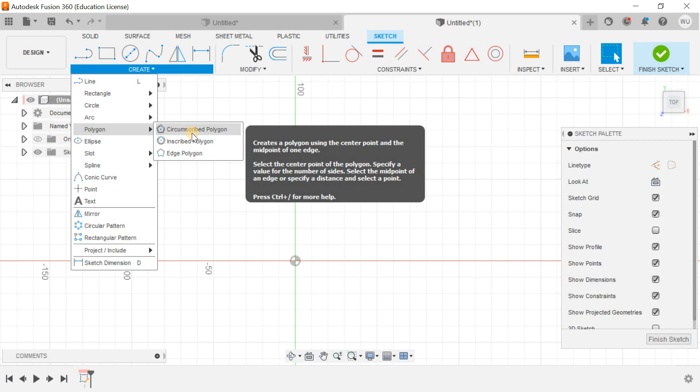Go for the sketch, and right now I will click and go for the polygon, and go for the circumscribed polygon, and here I will click somewhere here like this and define the side length 30 and hit enter.

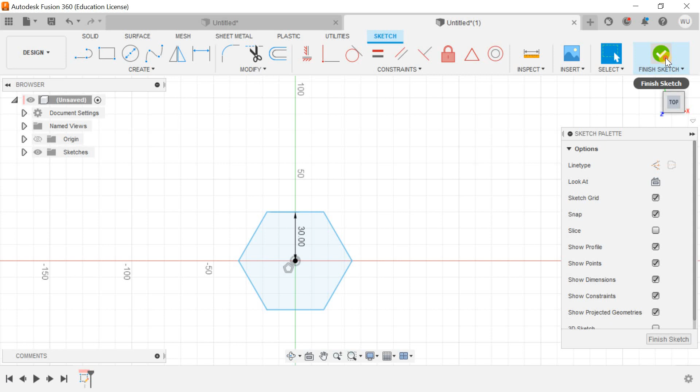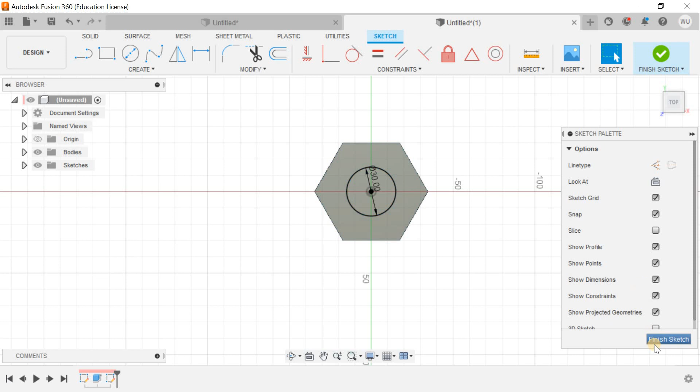Finish the sketch. Now I will go for extrude, define this one 12. Okay. Now again I will click on create sketch, choose this top surface, and starting from somewhere here define it 30 and hit OK. Now I will finish the sketch.

Go for extrude and let me drag it like this up to 100 mm and I will hit OK. See, rotate your object by pressing the middle mouse button and go to home.

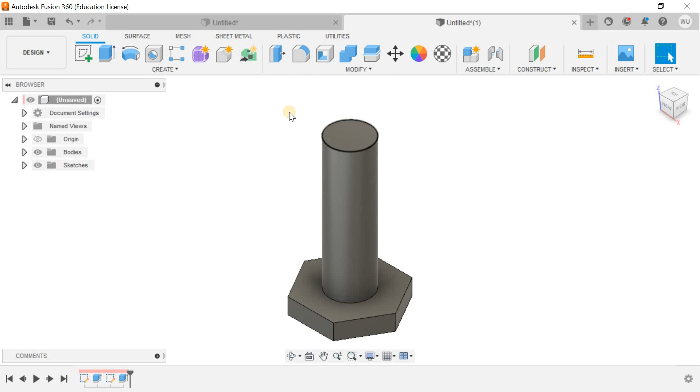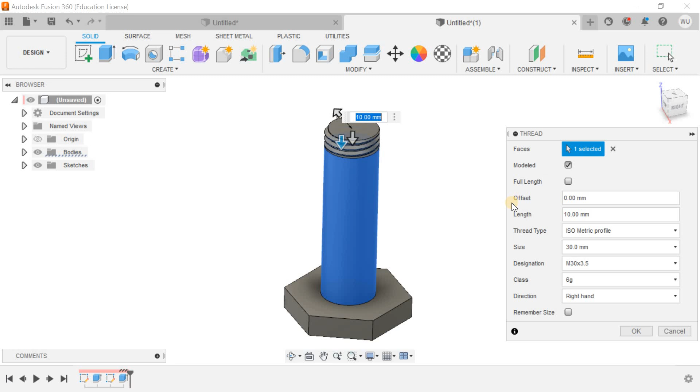Now I will go to create, and I want to create the threads. The face where you want to create threads is this one, and click on modeled. See, not full length, and the offset from this: the total length was 100 and I want to make threads at 80.

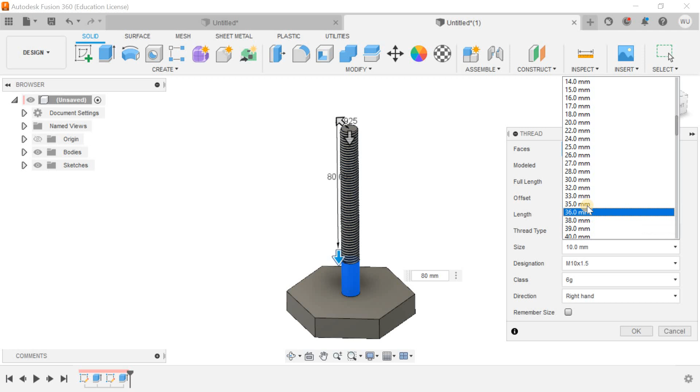Thread type is ISO Metric profile, and you can choose any one of them, whatever you want. I want ISO Metric profile, size is 30, you can keep it 27 or 10 mm. See, but this one is not the suitable one for me. I will select the 30.

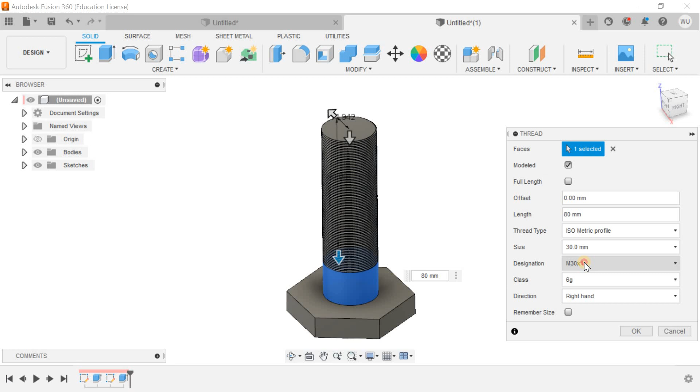Okay, designation M30, and I will select, actually this is the pitch. I want to select a 3 mm pitch, 3.5, 1. See, it gets closer, and I think 2.5 and 3.5 is better for me.

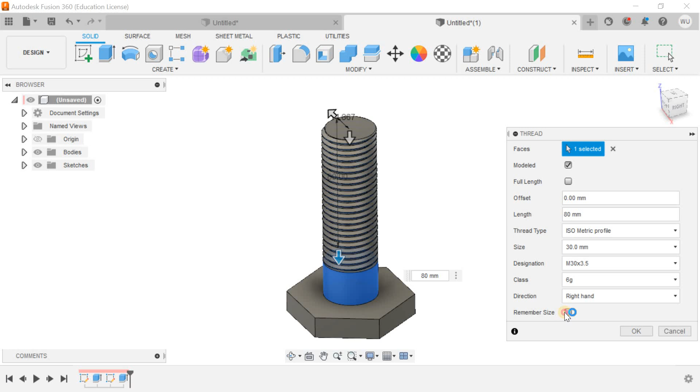Class is this one, and direction, you can just keep it left hand or right hand. Right hand is better for me, and remember the size. Okay, see.

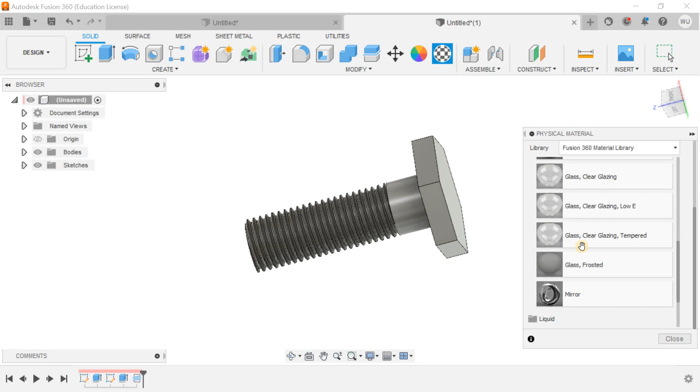Let me just apply a certain material, and for this I will go to the Glass and go for the mirror. Okay, see, it just looks shiny as you can see over here like this.